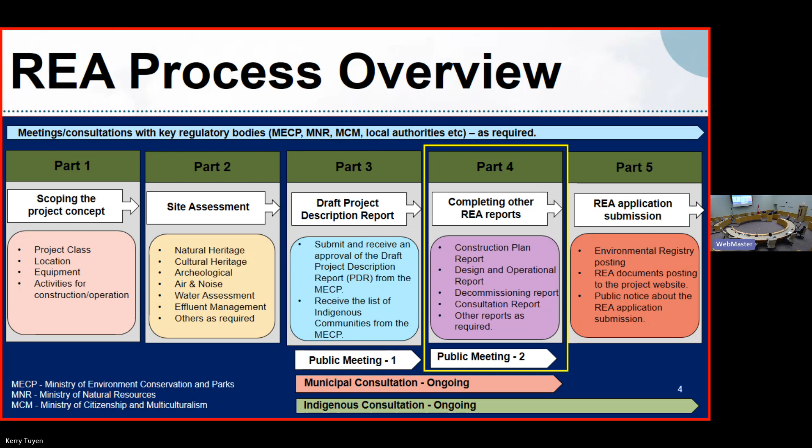And at any point, please feel free to raise your hands with any questions. So today we'll go through the project background, why we are doing this REA application. Then we'll go through the technical report summaries of all of the REA technical reports and studies that were done, and then look at the next steps from here and take any questions at the end or throughout the presentation as well. We can keep it informal that way.

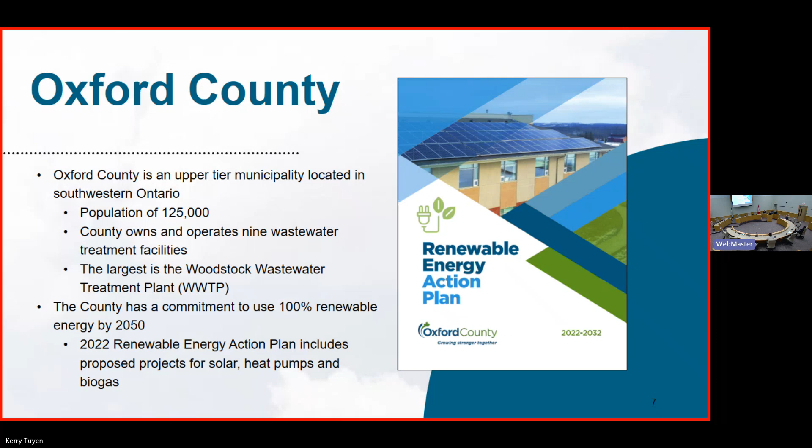So we'll start with the project background. As part of Oxford County's Renewable Energy Action Plan, there is a commitment by the county to use 100% renewable energy by 2050. And one of the initiatives to get there is this biogas utilization project at the Woodstock Wastewater Treatment Plant. So an overview of the Woodstock Wastewater Treatment Plant.

It is a wastewater treatment plant with a conventional activated sludge system with primary and secondary treatment, and it discharges to the Thames River. Historically, 55% of the biogas generated at the Woodstock Wastewater Treatment Plant has been used to fuel the boilers, but the remainder that does not get fed to the boilers is flared off. So what we're looking at for this project is taking that excess biogas and utilizing up to 100% of all the biogas generated on site.

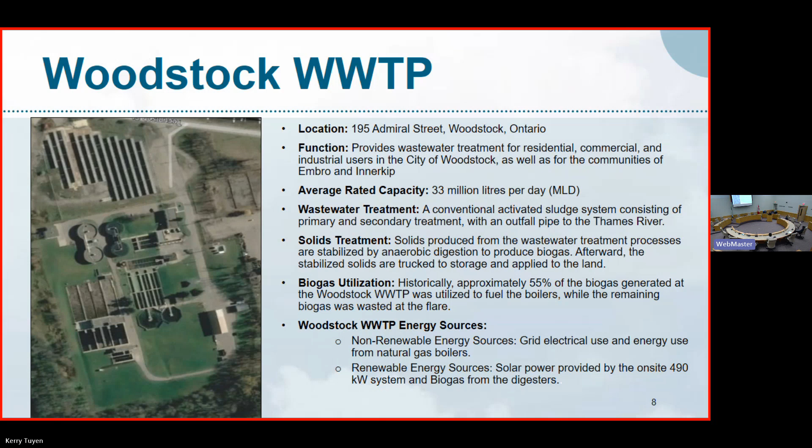The Woodstock Wastewater Treatment Plant has actually already looked at a photovoltaic project, and it has that implemented on site as well. So this is kind of like step 2 of renewable sources at this plant. An overview of this biogas utilization project and the steps that have already been done.

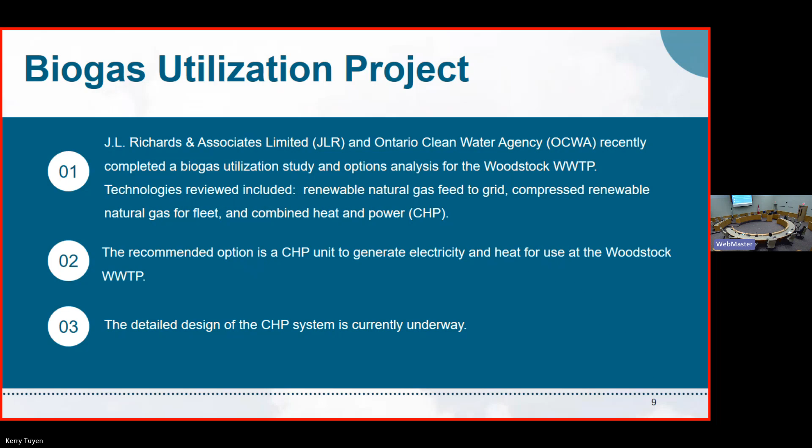JL Richards and OCWA, we completed this study, and the CHP, which is a combined heat and power unit, has been selected. Currently, it's at up to 100% design, and we have prepared all the documents for the REA application, and we are ready to submit after this public meeting.

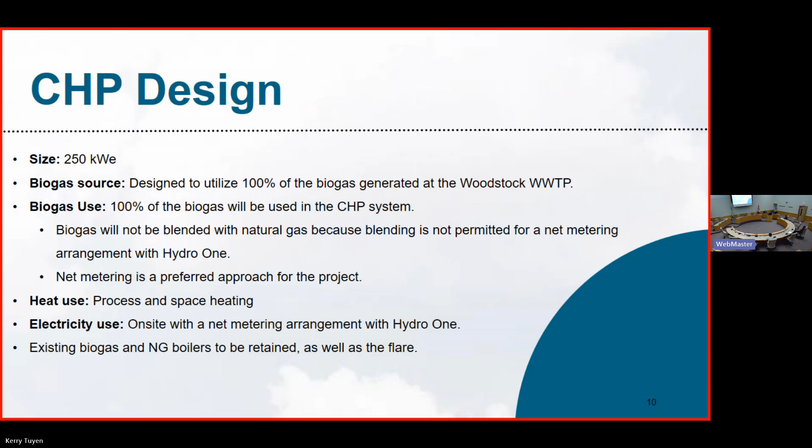So the CHP design itself is a 250 kilowatt electric capacity. It is designed to utilize 100% of the biogas that is generated at the Woodstock Wastewater Treatment Plant. And what it does is it takes the biogas and turns it into heat and power and sends it back for usage at the plant. And it is connected to the grid, and that is through a net metering arrangement with Hydro One.

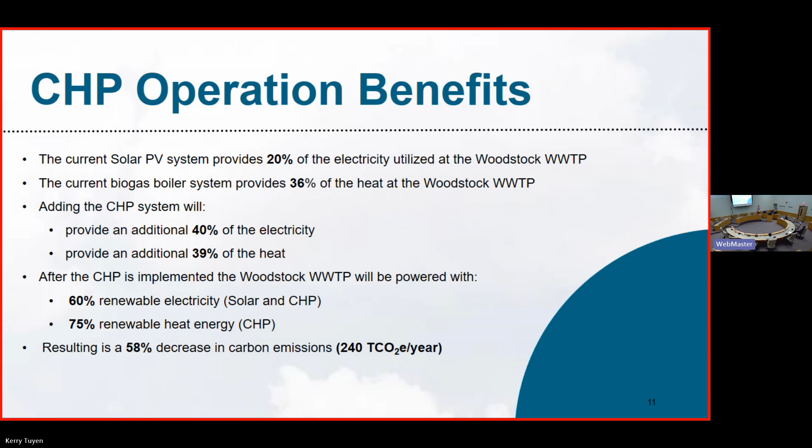Some of the benefits of the CHP and having it at the Woodstock Wastewater Treatment Plant is that it will allow the plant to be 60% renewable electricity. That's combined with the photovoltaic on site and the CHP. And this will result in a 58% decrease in carbon emissions from this plant.

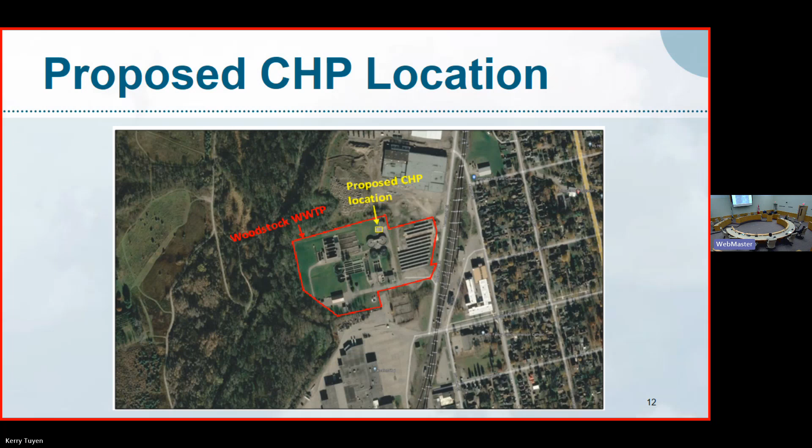Just a project site plan: where the Woodstock Wastewater Treatment Plant is located is outlined in the red, and the proposed CHP system, you can see, is within the existing site and it is pointed out in the yellow, which is kind of in the northeast corner, I believe, of the facility.

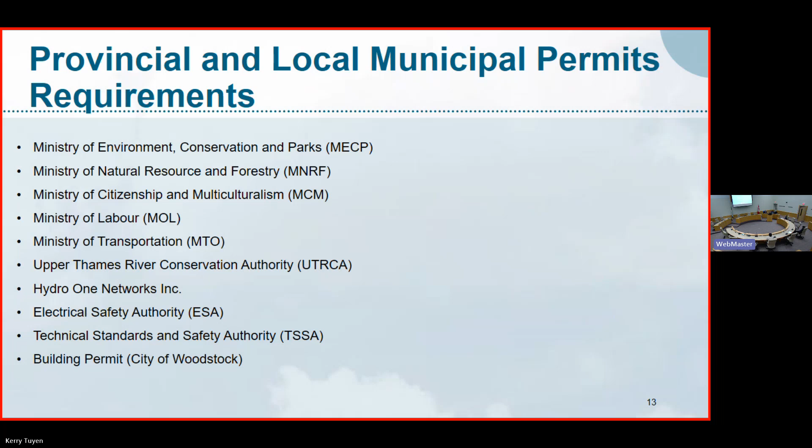So as part of this REA process, we looked at a lot of provincial and local municipal permits, and we have engaged with all the necessary ministries as well as all the necessary parties like the ESA, TSSA, Hydro One, and all permits that are required as well.

So now, as part of public meeting number 2, which is the final meeting, we are going to go through all of the technical reports that have been prepared for the REA application. Before I go into specific technical reports, I'm going to go through all of the required reports and give you an overview of what each of those reports serve, and then we'll dive into each of those reports and the summaries and the findings that we found.

So the first technical required document is the project description report. This project description report is a comprehensive overview of the entire project. It includes all the project components, contact information, location, the technology proposed, its capacity, project activities, and all the likely potential environmental impacts that we foresee with the project.

It is the start of the REA application where you outline what the potential effects are, and then you go into doing the actual technical report and study to confirm what those impacts actually are. So the project description report is a live document, it continues to be updated, and it is available on the Oxford website for your viewing at any time.

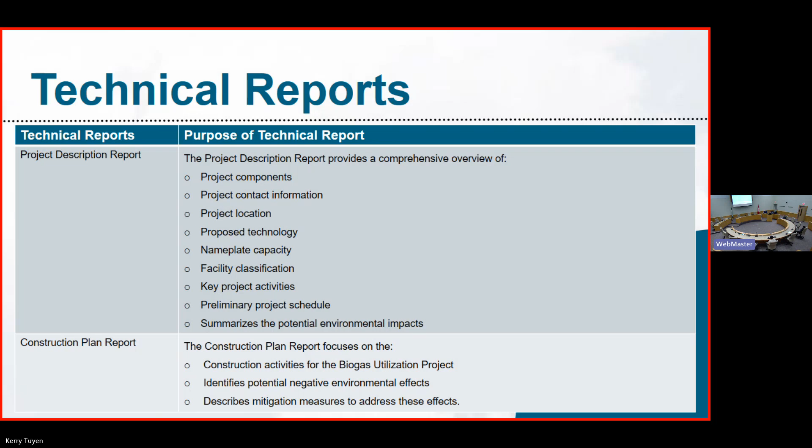The construction plan report focuses on all the construction activities for the biogas utilization project. It also looks at any negative environmental effects associated with all the construction activities through all the phases, and it goes through any mitigation measures to address those impacts.

The design and operations report focuses on the project site plan, key design components and facility operations plan, highlighting any negative environmental effects related to design and operations of the CHP system. And it also looks at emergency response and communication plans to mitigate those. The decommissioning plan looks at the CHP system and how we will decommission it responsibly, restoring the site back to what it used to be prior to the CHP implementation.

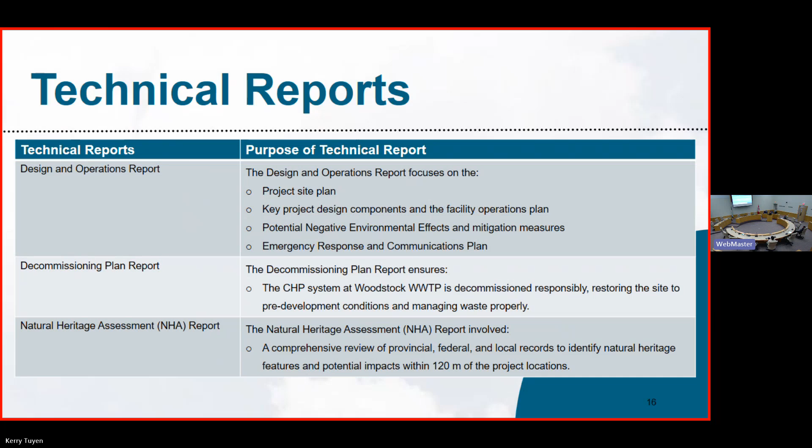The Natural Heritage Assessment Report, or the NHA, is a comprehensive overview of all the records that identify natural heritage and potential impacts within a 120-meter radius around the project location. And we highlight any potential impacts or any identified natural heritage in that area. The Cultural Heritage Assessment Report focuses on any cultural heritage resources within that same radius and anything that may be impacted by this project as well.

Going hand in hand with that is the Archaeological Assessment Report, and that looks at the archaeological potential at the project site. It confirms if there's anything that's been on the land that has not been looked at, and if there's any archaeological pieces to that. And we go through and confirm that piece with that report.

The noise study report looks at noise emissions from the existing and the new proposed CHP system, and ensures that we comply with the Ontario environmental regulations, and if there are any findings there, the mitigations associated with that.

Air emission studies: this is the dispersion modeling, where we look at the emissions from both the existing and the new CHP system as part of the biogas utilization project, and evaluate and make sure that they're in compliance with the air quality standards, and any mitigation measures associated with any additional emissions that the CHP system would add to the existing emissions of the plant.

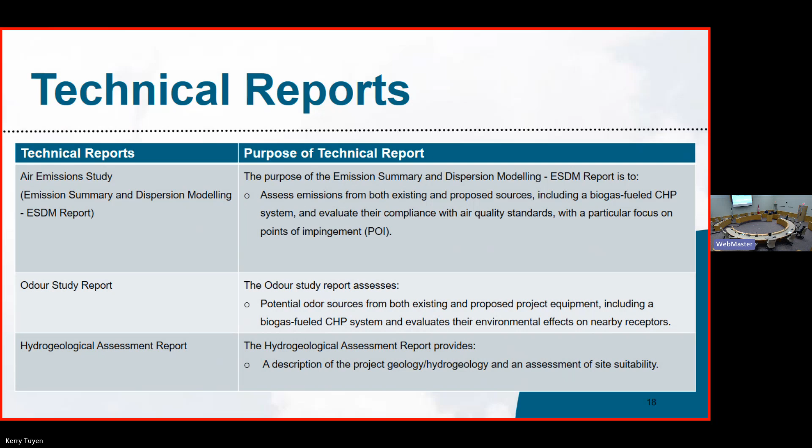The odor study report, similar to the air emissions, but looks at odor. It looks at both the existing and the new proposed project, any additional odor, and then evaluates any negative new impacts and mitigation measures on that. The hydrogeological assessment report looks at the project and assesses it for the geological nature of it and any new negative potential impacts as well.

Surface water assessment, this was something that was added that we had to provide, and this one looks at the existing surface water conditions, ensures that we comply with all the environmental regulations, and that we are not increasing or introducing a new negative impact as well with the CHP system. Similarly, the stormwater management plan looks at the addition of the CHP system and any additional measures that come with it that affect the stormwater through the plant.

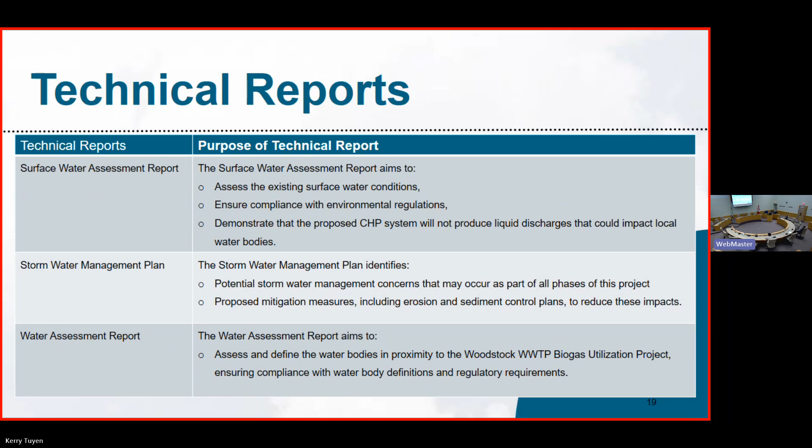Water assessment report, very similar to that, assesses and defines all the water bodies in that area and if there's any negative impacts with the CHP system implemented on site. We're almost there to all the reports. Effluent management plan looks at the existing effluent at site and if the new project, the CHP system, affects the effluent management, and if it does, the mitigation measures there.

Traffic management looks at if, with the new proposed project, there's any impact to traffic and mitigation measures for any new negative environmental impacts. Then finally, the consultation report is part of the consultation process of this REA application, and it documents all of the communication, all the meetings, all the engagement with the public, and every party that has been engaged and been in contact for this project, and it outlines all of that in our report, and it also helps to meet the requirement of Regulation 359 for the REA application.

So now we'll jump into every specific report that I just gave an overview on. So in the project description report, we identified that we would like to propose a CHP system at the existing wastewater treatment plant at Woodstock, and that the capacity would be 250 kilowatt electric. It is defined as a class 3 anaerobic digestion facility, as it is not located on a farm operation.

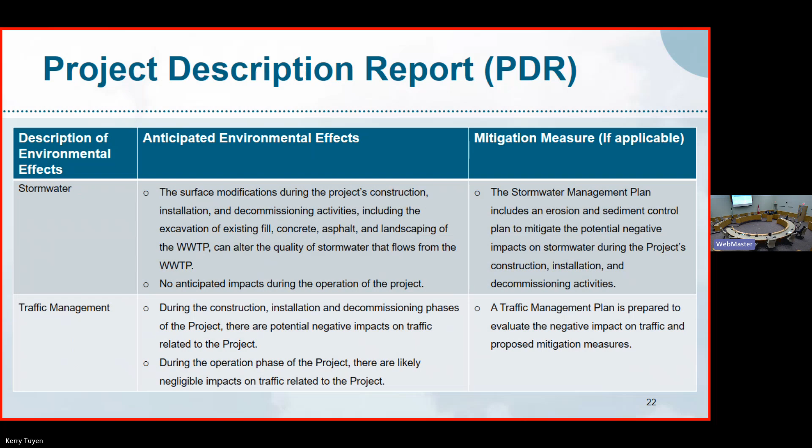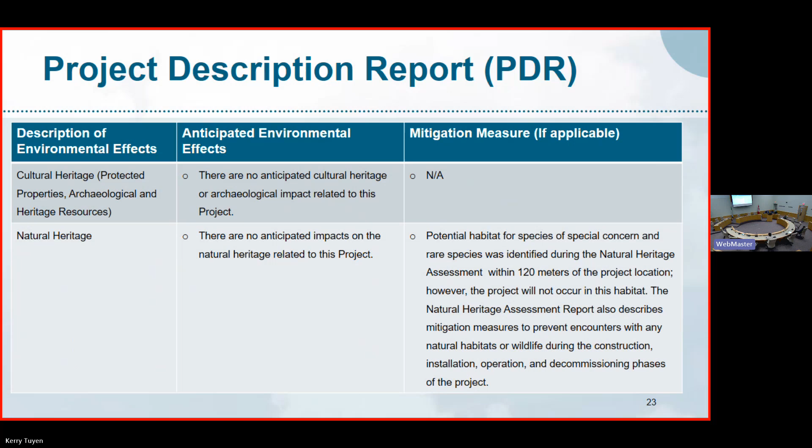In cultural heritage, we did not foresee any additional impacts on cultural heritage or archaeological impact, and that was because it is on a pre-disturbed existing location on site. So we did not foresee any negative impact, but we still carried out this report to make sure that was true. Similarly with the natural heritage, we said that holds because we are installing the unit on pre-disturbed land, and we also executed this natural heritage report to make sure that was the case.

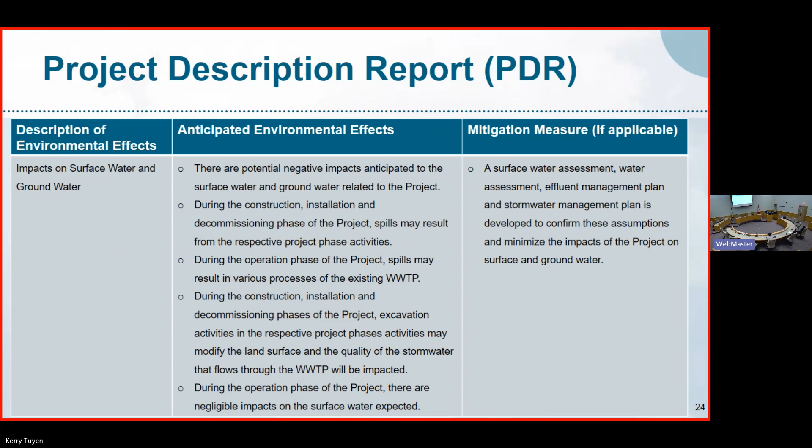Impacts on surface water and groundwater. So we anticipated that during the construction, installation, and decommissioning of the project, there would be some impacts on surface water and groundwater, and that's because of the excavation work that would be done, a bit of construction work on site when we install and remove the unit during the installation and decommissioning phase of the project. But we did not anticipate any additional impact during the operation. So we carried out these plans to confirm those assumptions as well, to see if there were any additional negative impacts associated with the surface water and groundwater.

There's a trend here that we anticipate most of the reports, similar to emissions to air and noise, show small minor impacts during construction, installation, and decommissioning, but not during operation of the unit on site. We carried out these reports on emissions to air and noise to confirm that.

We also looked at public health and safety, and because it's on an existing site, we believe that during operations there would be no additional negative impact because it's contained within the existing facility. But during construction, installation, and decommissioning, there would be more increased traffic in the area to bring the unit in and out, along with associated construction and decommissioning equipment.

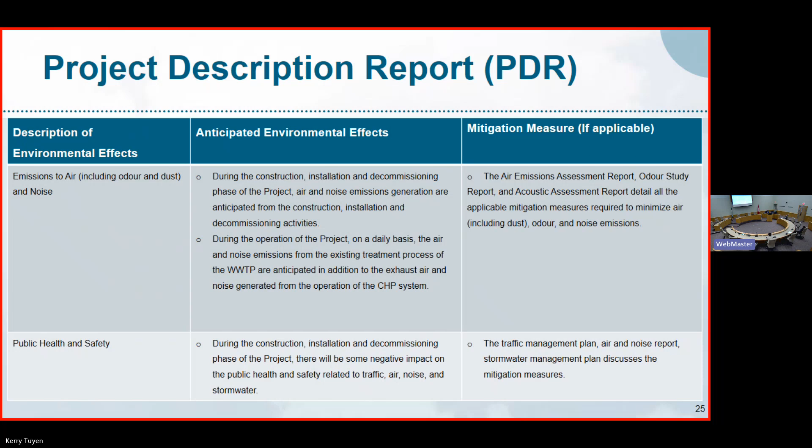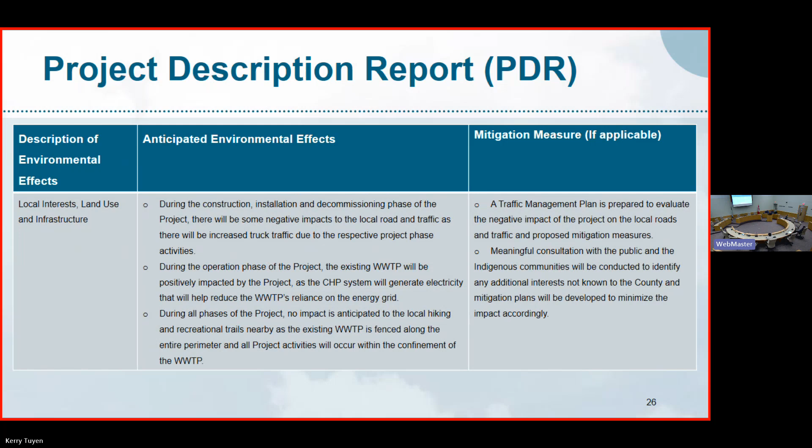Local interest, land use, and infrastructure. Here we looked at any impacts to local interests, land use nearby, and nearby infrastructure. During operation of this unit, we don't see any additional negative impact because it's located in the existing facility and would all be contained. But during construction and decommissioning, increased traffic will impact local roads with equipment coming in and out of the site. So we looked at the traffic management plan to ensure we're addressing local roads and all applicable permits required during construction and decommissioning to minimize that traffic impact.

So that was the project description report, the first report completed and shared prior to the first public meeting. We set out what we expect to find and what kind of impacts we foresee, and then we carry out every single report to confirm those impacts.

We looked at the construction plan report and identified all the activities during construction, which includes site preparation, installation, and post-installation activities like landscape remediation work. We looked at all the equipment required, such as utility vehicles, excavators, dump trucks, concrete mixers, transport trucks, cranes, and rigging devices, and looked at the access roads in and out of the plant to get this equipment to the site.

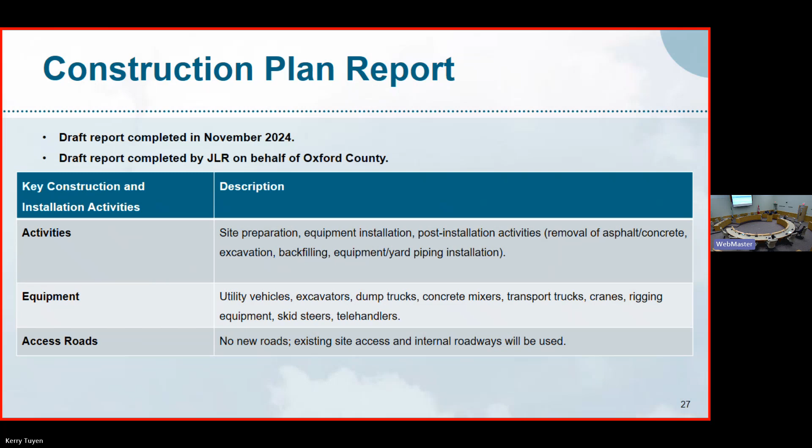We identified that no new roads would be required, that we would be using all existing roads and internal roadways, so nothing new in or outside the plant to accommodate the equipment coming in and out during construction. We also looked at surrounding areas and vegetation, and because it's all within the existing plant, we did not see any impact there.

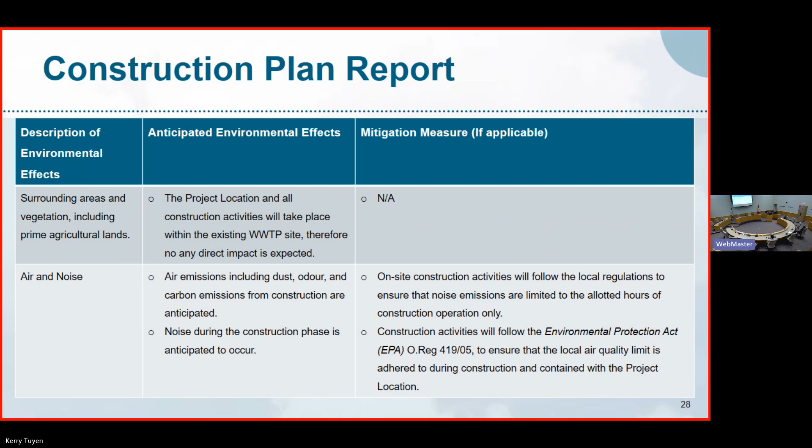We also looked at water sources within the construction activities and impacts during construction, such as erosion, sedimentation, and spills. We looked at how to contain everything so we don't contaminate water sources nearby when excavation works are underway. So we looked at putting up fencing, basin liners, stockpile material, and berms to contain everything so we're not contaminating nearby water sources. That's detailed in the construction plan report.

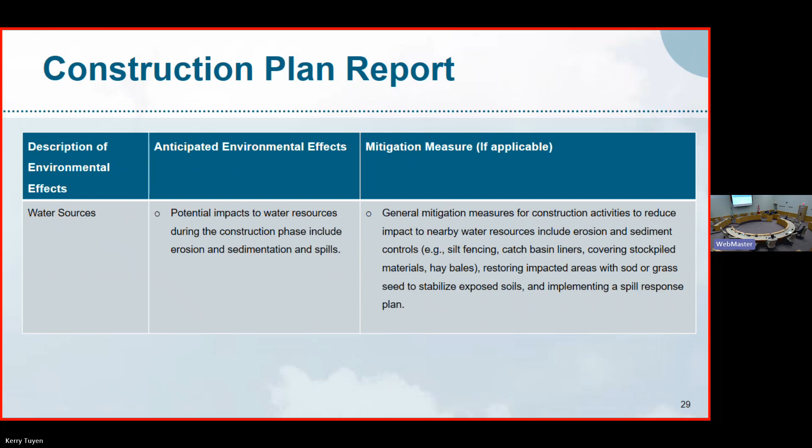Under the natural heritage assessment, we looked at all the natural heritage in a 120-meter radius around the project location. We identified that there are significant natural features and species at risk in that 120-meter radius around the project. We followed up with the MECP species at risk branch to confirm where we are doing our project, and we identified potential habitat.

We found that although we identified species at risk and potential habitat within that 120-meter radius, because the CHP system is on the pre-disturbed and fenced-in area of the existing facility, we did not anticipate that we would impact any of that potential habitat. That was the conclusion of the natural heritage assessment. We would ensure that all food waste and garbage during construction are properly secured and disposed of to prevent attracting wildlife to the facility, and that there's proper site drainage so we don't have standing pools of water or contamination. That was the conclusion of the natural heritage report.

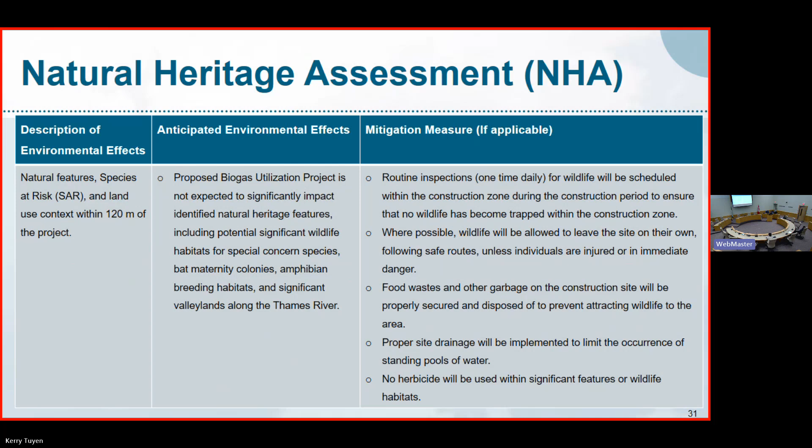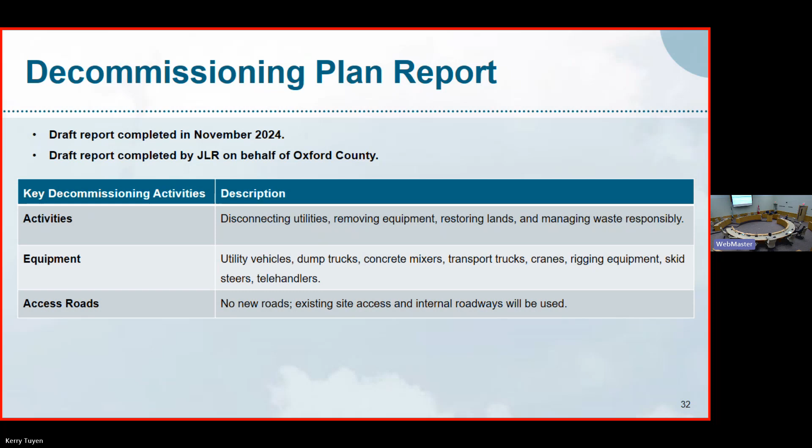In the decommissioning plan report, this report outlines a plan of how we will remove the CHP system from site once it is at its end of life. So we look at how we're going to disconnect it, remove it, restore the land, and manage the waste responsibly. We looked at all the equipment required and any impacts, any additional new roads or access required, and confirmed that no new roads are required. We use all existing ones. Similar to the construction report, the same amount of vehicles are required to remove everything and remediate the land back to its normal state prior to the CHP implementation.

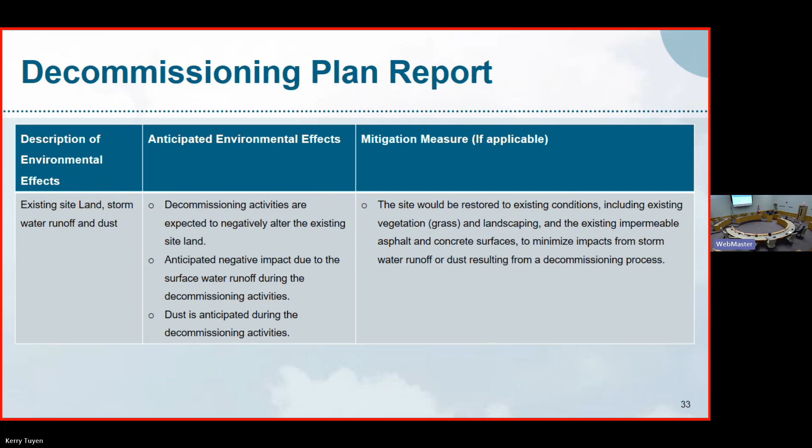So here again, we looked at that. We anticipated there would be negative impacts to the surface water runoff during decommissioning activities, because we anticipate there would be dust and some excavation work. So we looked at making sure that we contain everything, including the stormwater runoff during the decommissioning process, to mitigate these potential impacts.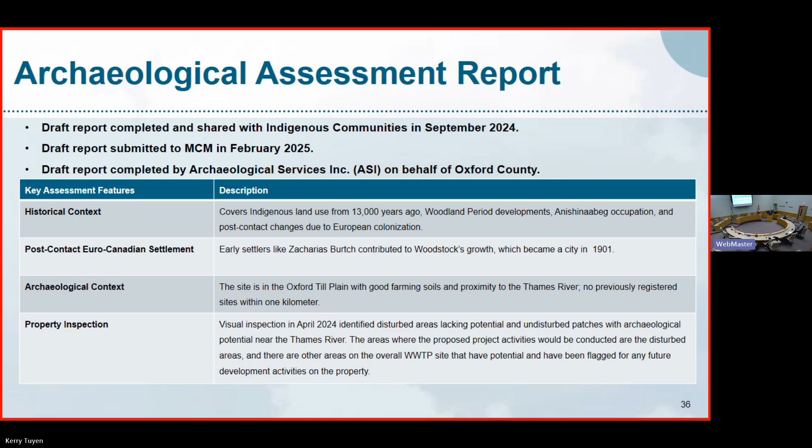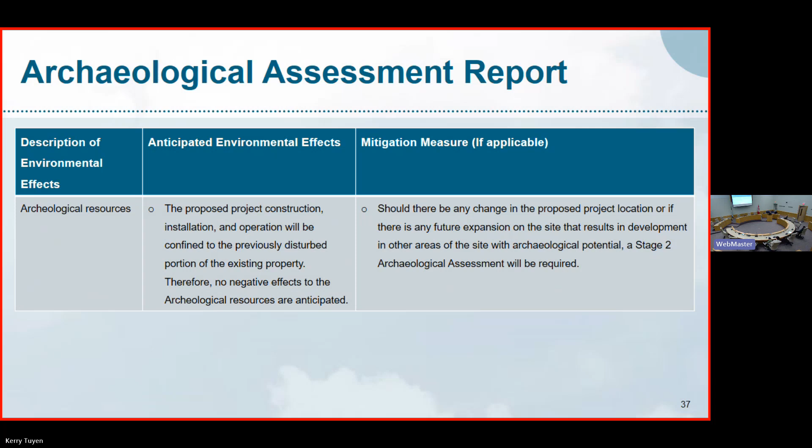Similar to that is the archaeological assessment report. What we look at is the historical context of the land, and we know that the land was used prior by indigenous peoples 13,000 years ago. We look at the history of the land up to its current state, when the Woodstock Wastewater Treatment Plant was implemented, and we look at any impacts and any archaeological resources that could be on the land. When we did this study, we did not do a stage 2 archaeological assessment, but because we are installing the CHP on pre-disturbed land that had already been dug up before, that was not required, and there would be no archaeological resources found there.

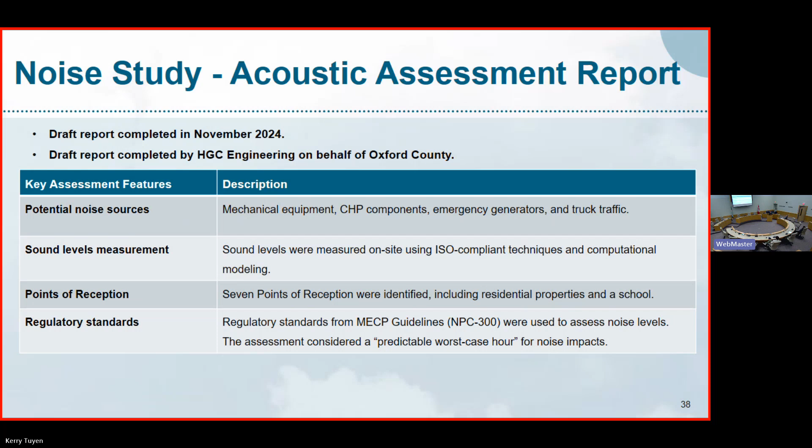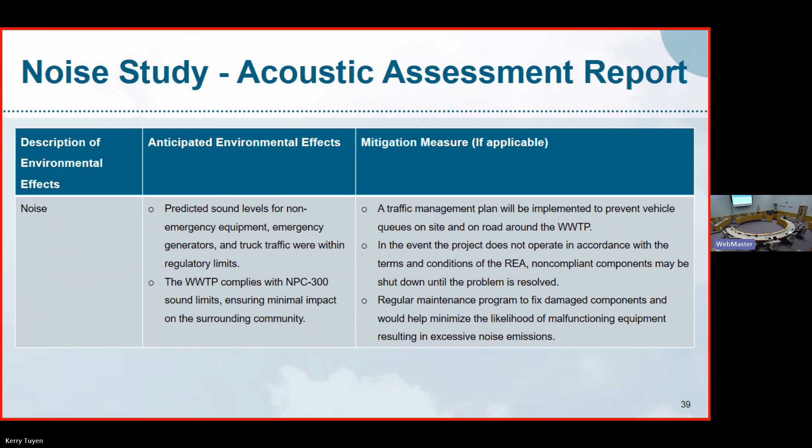So the noise study and acoustic assessment report: we look at all the noise that could come from all phases of the project. We identified that during construction and decommissioning there would be increased noise, but we did not anticipate that during the operation of the unit there would be additional noise beyond what the current site already produces. So we looked at the traffic management plan and put in mitigations to minimize noise, doing construction only during construction hours so that during the construction and decommissioning phases we adhere to those bylaws.

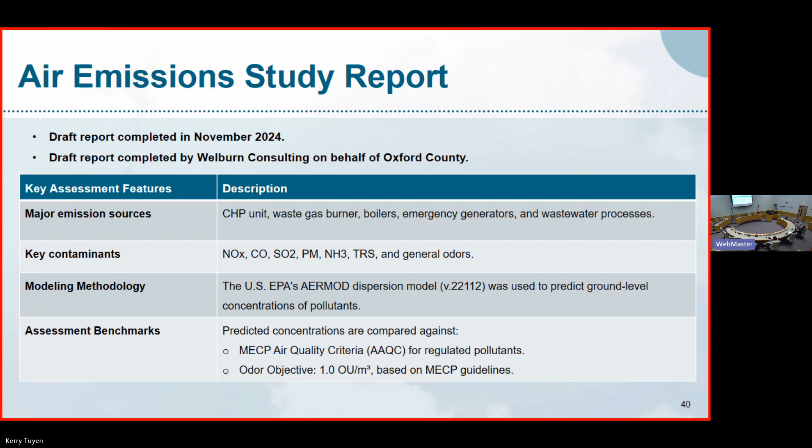Air emission study report: here we look at any air emissions associated with the project. We identified that all contaminants were assessed, and overall the facility complies with all regulations for air emissions. We looked at the equipment used during construction and decommissioning, and developed the traffic management plan to ensure we're using the best vehicles during those phases to reduce emissions. We also developed a regular maintenance program to make sure the CHP system is always maintained so it does not produce additional emissions due to lack of maintenance.

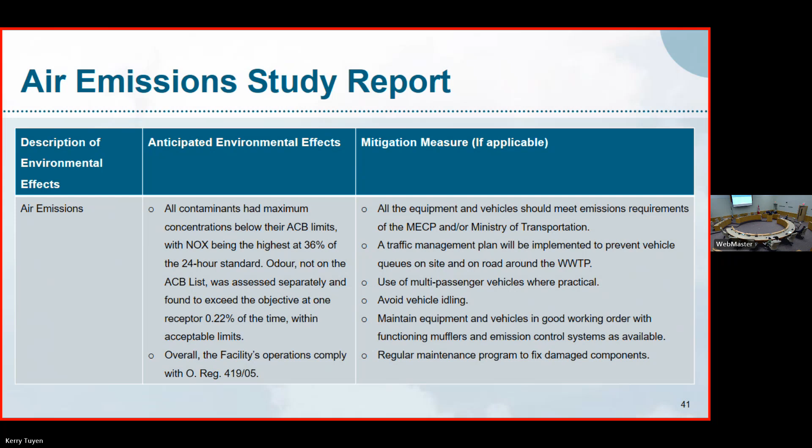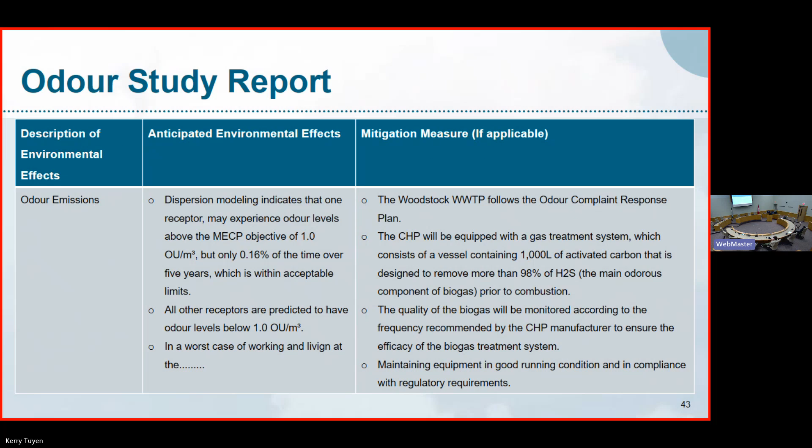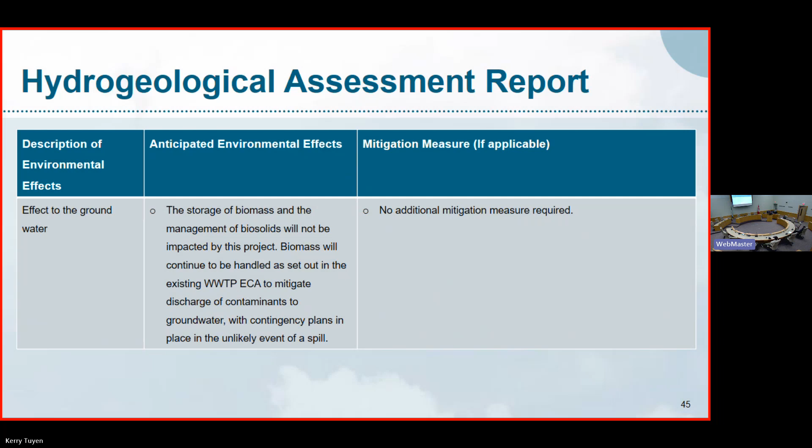The hydrogeological assessment report looks at the effects to the groundwater. We looked at the storage of the biomass and the management of the biosolids, and examined whether it has any impact on this project. We concluded that it does not have an impact, so we did not have any additional mitigation measures associated with groundwater management.

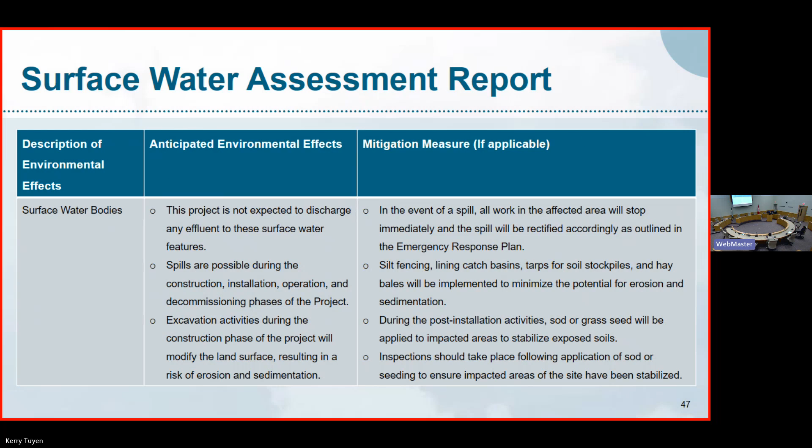So what we did was modify the existing emergency response plan so that any spills during construction and decommissioning would follow a spill action to clean up and contain within the site, preventing contamination of nearby surface water bodies. We looked at putting in fencing during construction to contain everything, and properly remediating the landscape after construction and decommissioning so there's no additional runoff from the facility because of the excavation work associated with the CHP system.

The water assessment report also looks at the water bodies nearby the plant. We looked at the Thames River and the wetland, and confirmed there was no additional impact there, so no additional mitigation measures were needed for that piece.

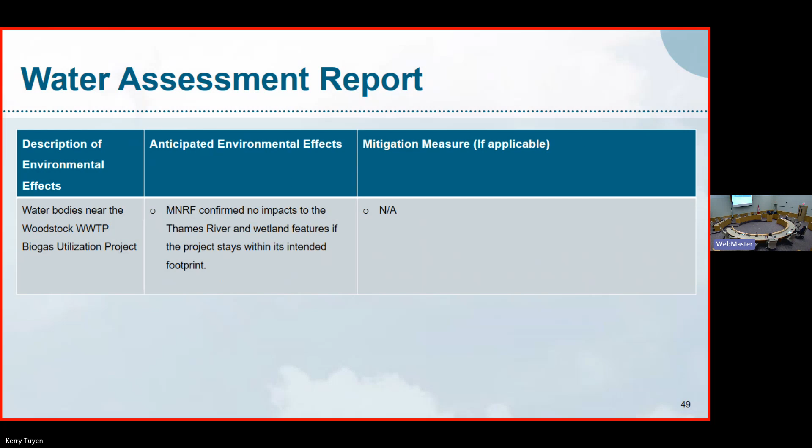The design and operations report, as previously stated, looks at this project and all the potential impacts of the actual design and operation of the system. We produced an emergency response procedure for the project to make sure the CHP system will follow the existing emergency plan on site. It's an additional piece of equipment in the wastewater treatment plant, and it will follow all of the emergency response procedures already in place.

Any non-emergency communication to the public will also follow the same procedure the wastewater treatment plant follows now, sharing through media channels, the project website, newspaper notices, and community bulletin boards, similar to what we already do now for the facility.

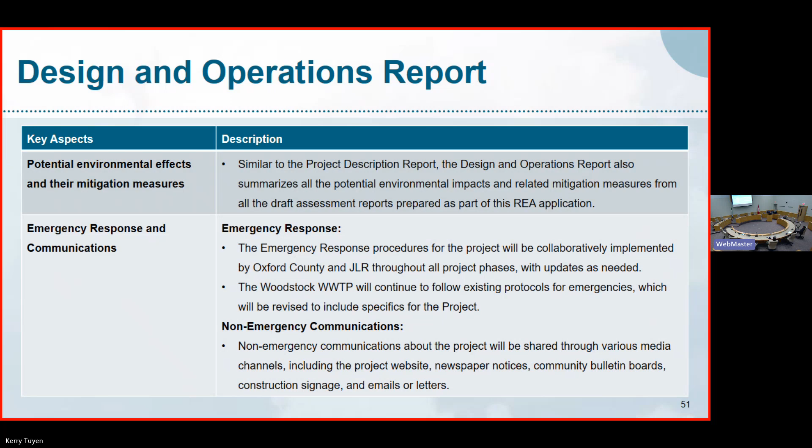So we're almost there. The stormwater management plan looks at all phases of the project and any potential negative impacts. We thought during construction and decommissioning there would be negative impacts because of the excavation work and runoff affecting stormwater. But during operations, because that land would be remediated with no additional runoff, we did not anticipate any additional negative effects.

To combat those negative impacts of stormwater during construction and decommissioning, we would make sure we have catch basins, a spill plan, and contain everything. Post construction and post decommissioning, when the equipment is taken off site, the land would be remediated with proper sod and grass seed to ensure there's no additional runoff after we remove or install the equipment during construction.

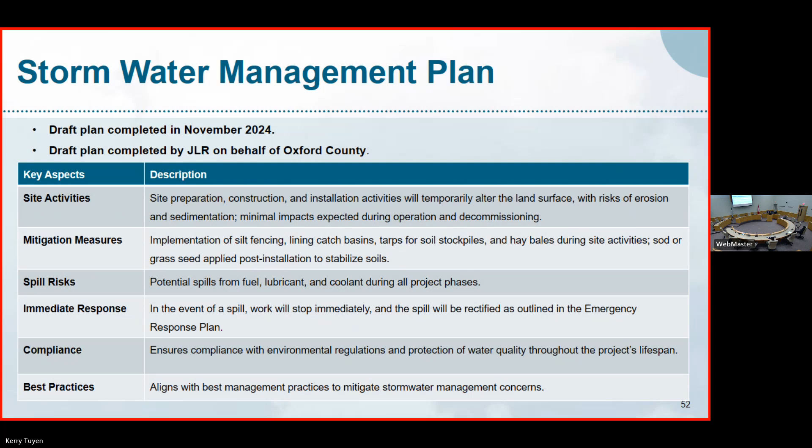Traffic management plan. This is a plan we put in place to minimize negative impacts, since during construction and decommissioning there would be increased traffic noise and congestion. We put together a plan for how we would follow local permits, local bylaws, and road permits to ensure we're adhering to using local roads, with no oversized loads anticipated.

We looked at what roads we would use. We don't need new roads, we use the existing ones, and we would make sure proper traffic personnel are used during construction to reduce any traffic and health and safety hazards from trucks coming into the community and out of that area during those phases.

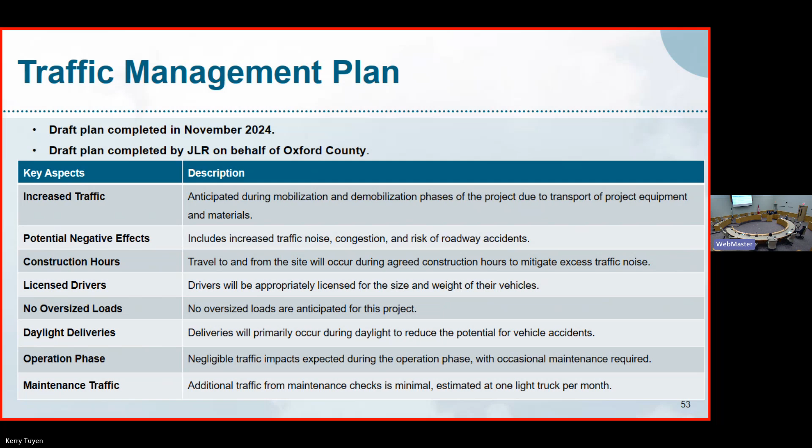The effluent management plan looks at whether there would be any impact to the effluent requirements that the wastewater treatment plant has with this project. We do not anticipate any additional impacts to the effluent, so there was no mitigation or additional measures needed. The existing effluent management plan and discharge limits of the wastewater treatment plant will be followed. So no further actions on this piece.

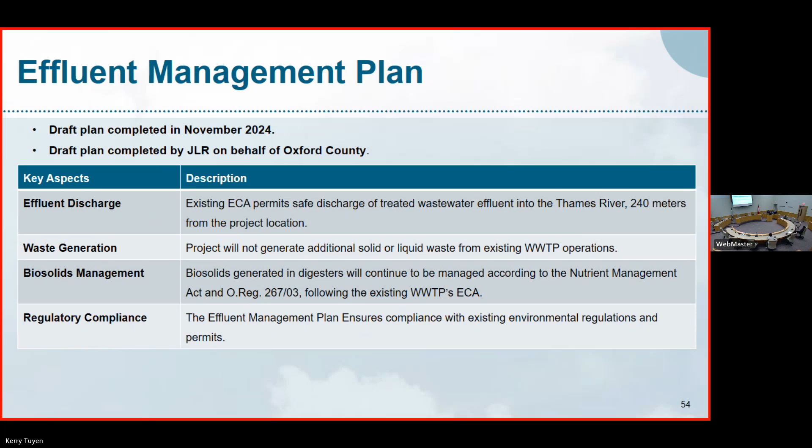So the consultation report, all the reports I just went through in so much detail, you can get even more details on them on Oxford's website. All the reports have been completed, dated, and are available and posted online that you have access to and can read at any point in time.

The last report to be posted, in March of this year, is the consultation report. It marks all the communications we've had with every single party, every ministry, every engagement party for this project, and all the correspondence with it. It also outlines the public meetings, all the questions and answers we've had in the first public meeting and also in this final public meeting.

It will also be accessible online and ready in March of this year. You can see all the correspondence we've had throughout this entire project. It is an open, transparent report to show all the parties we've engaged with and to follow the REA process.

Which now brings me to the REA schedule and the next steps. So this is the outline of the schedule. We started doing all of our technical studies, and as I mentioned, we have completed all of them except for the consultation report, because we have to finish this public meeting first. After this meeting, that consultation report would be available shortly, in March.

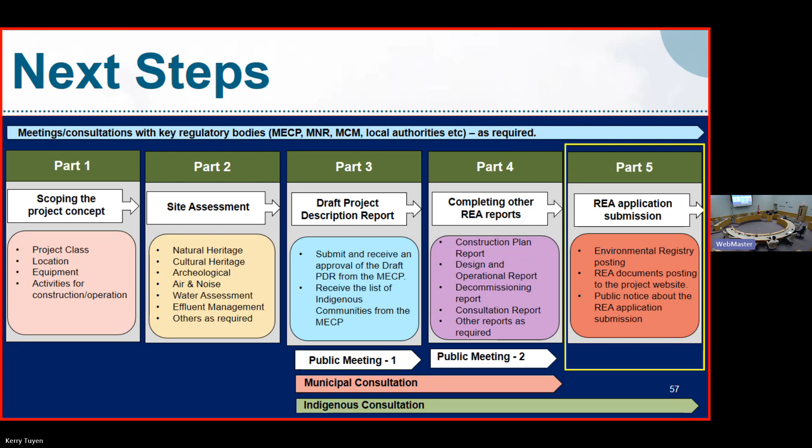We are finished with part 4 as of today after this meeting, so we will be submitting the application. The application itself contains all the reports, which are online. Everything we have posted online is what we will be sending to the MECP, and it will be available at any point in time to the public to access.

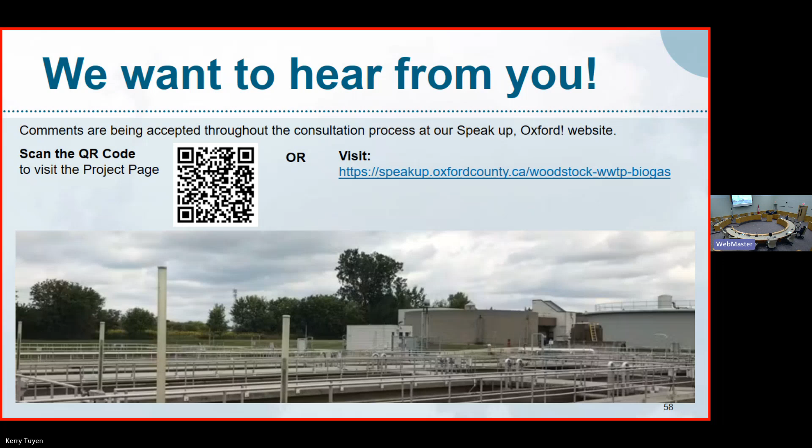So at this point, that's the end of this presentation. If you have any questions, you can always reach out to the contacts here. And now we'll be taking any questions from the public in the room and online.